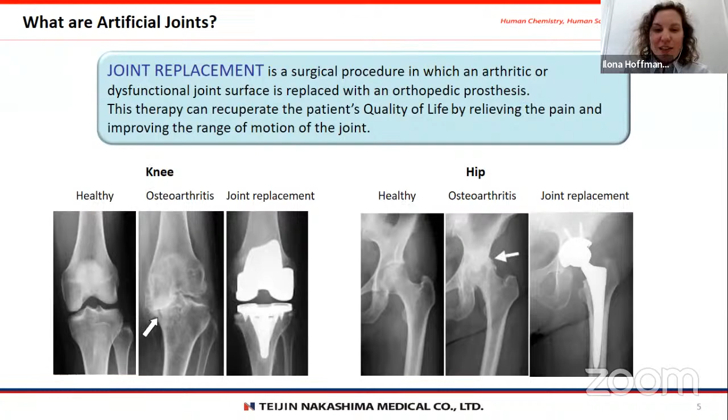The manufacturing process for propellers starts with the design phase. Then the propeller is cast. It is then machined and finally polished.

For the production of an artificial joint, the process is very similar. We start with the design, then it's cast, or in recent years 3D printed. It will then be machined and finally polished.

This final polishing step is actually the reason why we, originally a propeller manufacturer, are now producing artificial joints. A friend of our CEO once visited the factory and said, wow, with this advanced polishing technology you guys could be making artificial joints. Have you ever thought about it? And that's how the business idea got started.

Our products cover several joints in the body, from small joints like finger joints, to mid-size joints like elbows. The main implants are hip and knee, but also trauma fixation devices like the intramedullary nail or clavicle plates. In recent years, we've also started selling implants for spinal fixation.

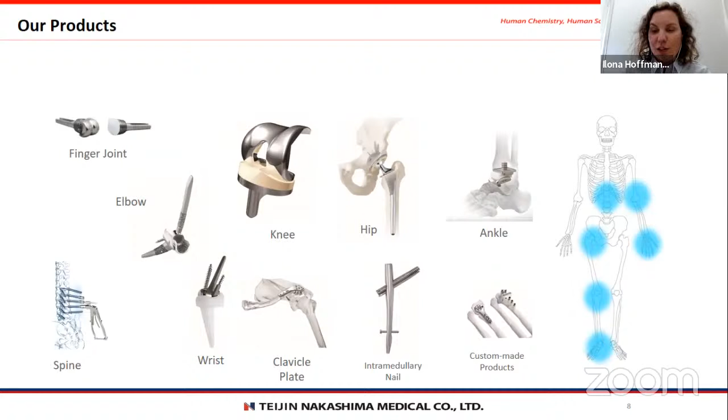Among all these products, the artificial hip joint and the spine products contain 3D printed parts.

We not only produce the artificial joints themselves, but we also make the surgical instruments that surgeons use to implant our products. Here I'm showing you as an example the set for the knee, which contains about 230 fixed items. These are shipped every time a hospital buys an implant from us, together with the implant. This is a service we do free of charge. In addition to those fixed items, we also supply 3D printed patient-matched instruments.

On this next slide I'm going to explain what those 3D patient-matched instruments are. They are personalized cutting guides that surgeons use to prepare the bone for surgery when they want to implant an artificial joint. This improves the accuracy of the surgery, shortens surgical time, and reduces the number of instruments needed for the operation.

The process starts by taking a CT scan of the patient's joint, which is used in pre-surgical planning. From those CT scans we can construct a 3D image of the patient's joint. Based on the size and structure, we decide which implant size is roughly needed, and together with the surgeon decide where the cuts need to be made.

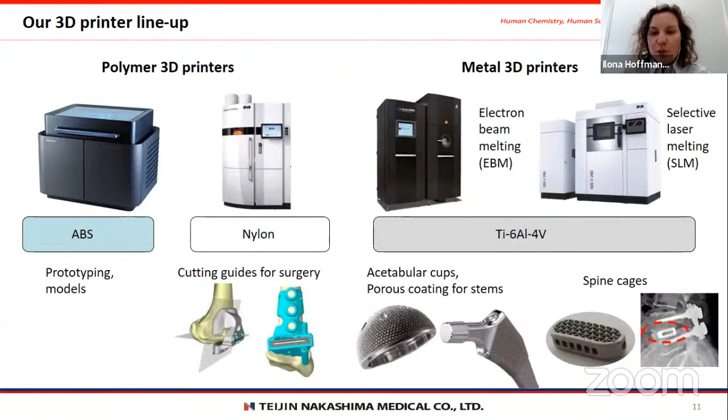We're also using two types of metal 3D printers: one is an electron beam melting printer, and the other is a selective laser melting device. Those are used with titanium 64 alloy to make acetabular cups and porous coating for stems, and to make spine cages.

Our goals in artificial joint development are a longer lifetime, advanced functionality, and optimal performance of the devices. And to achieve those three goals, we are specifically looking at four different areas.

One of them is the durability of the bearing materials. That means we need high wear resistance and low bioreactivity of the wear particles that are produced. And we are using vitamin E to achieve those two goals. So what we do is add vitamin E to the UHMWPE, which is one of the bearing materials used in the joints.

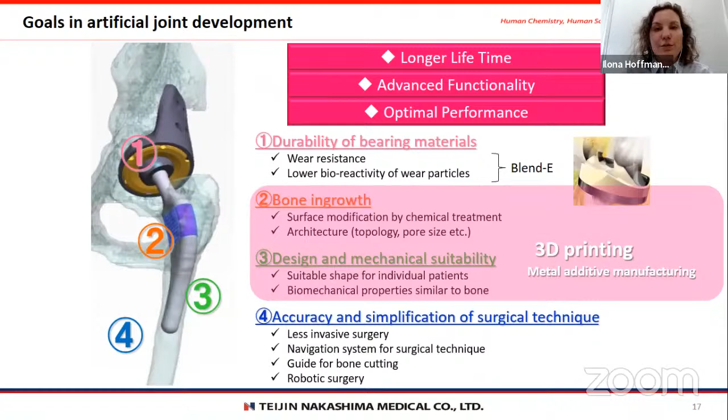Our specialty are implants specifically geared towards Japanese patients. We started making these implants because the Japanese population is on average shorter compared to Westerners, and most implant manufacturers doing business in Japan are actually American companies. So their implants are designed for Americans, and many of their products are too large to fit a shorter Japanese person's bones.

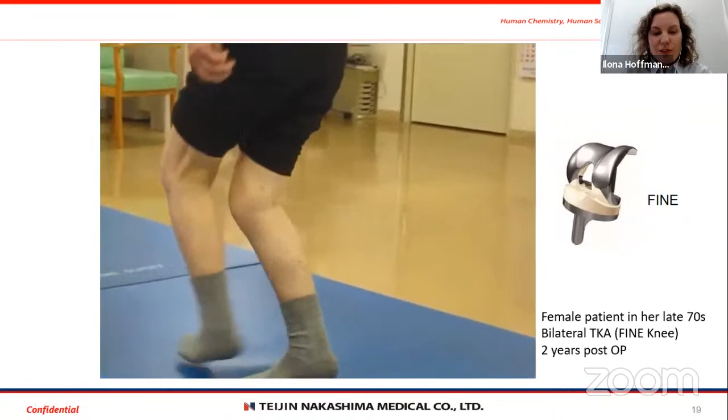Here I'm showing you a patient who received our artificial knee implant. She's in her late 70s and got bilateral total knee arthroplasty, meaning both of her knees are now artificial implants. This was taken two years post-operatively. You can see she's sitting without problems, and she's also still agile and running around pretty quickly.

So what are the steps to do metal additive manufacturing? First you create a 3D CAD model, and that data is sliced by software to be fed into the 3D printer. Inside the printer, you have a powder bed, a layer of metal powder that is melted by an electron beam to produce the part. Once one layer has been selectively melted, a rake spreads another layer of metal powder over it, and that is melted again. This process is repeated until you get your final part.

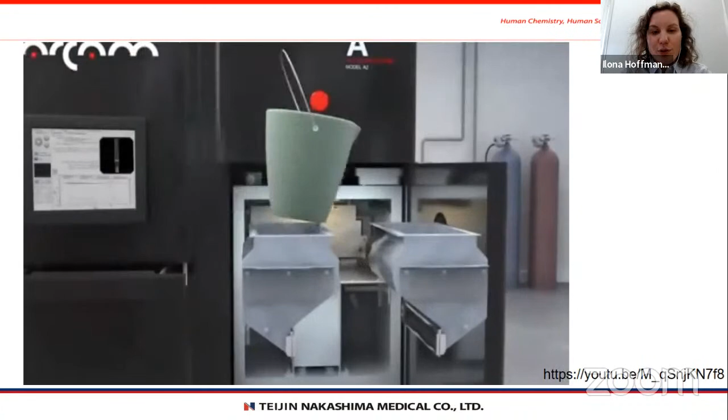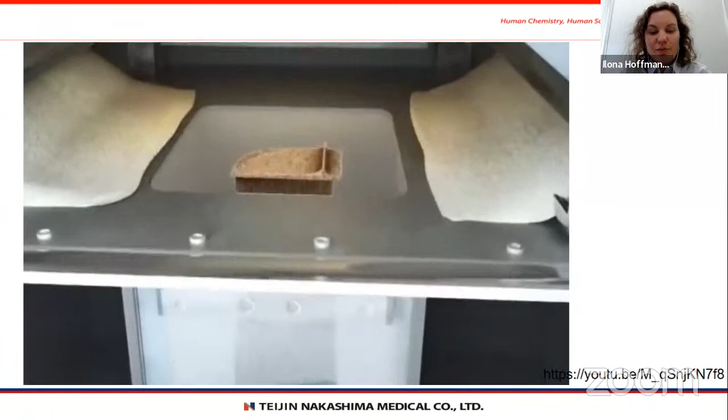First, the 3D printer is filled with the raw material, which is metal powder. Then the rake deposits the first layer, and that's being melted. Then the next layer is spread out and melted, and so on and so forth, gradually building up the whole part. That is then taken out. There's still a lot of powder surrounding the part, so we need to depowder it, and it's blasted to remove the excess powder.

Another advantage is that 3D printing is a free-form fabrication process, meaning no molds are used to produce the structure, so profitability is largely independent from lot sizes. You can start with lot sizes of one, because you don't need to produce hundreds or thousands of parts to offset the high cost of a mold. 3D printing also allows for near net shape manufacturing, which reduces the processing steps needed afterwards, and it can lead to reduced waste compared to subtractive manufacturing, where depending on the shape of your part, you have to cut away a lot of the material you started with.

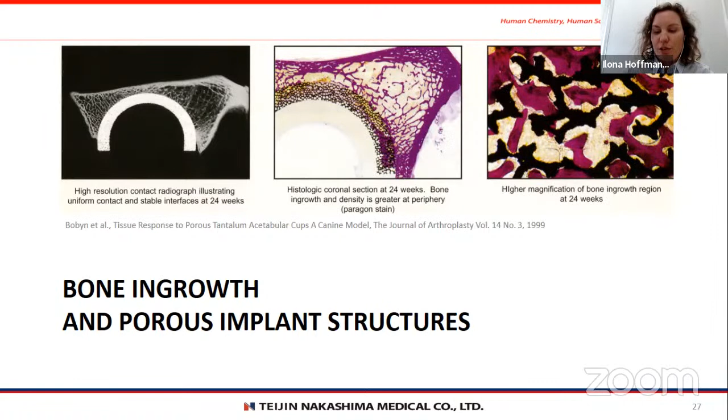Next, I'd like to talk about bone ingrowth and porous implant structures. Implant fixation can be broadly divided into two methods: cemented implants and uncemented implants. In the case of a cemented implant, the implant surface is usually smooth, and cement is added between the implant and the bone. The cement sounds like glue, but it doesn't quite work like glue. It's more like a malleable clay that takes on the shape of both the bone surface and the metal implant surface, and gives you a good fit between those two parts.

In the case of uncemented implants, they have a porous coating on the surface, and the porous coating next to the bone is thought to let the bone grow into the porous structure. Because the bone ingrowth is required for this type of fixation, it's usually reserved for younger patients because their bone is more active and more likely to actually grow into those porous surfaces.

However, this bone ingrowth process takes a little bit of time, and until bone growth is established, the implant needs to be fixed in place with a different method. For that, usually screws are used, and those are oftentimes used in combination with friction—a surface that has a high coefficient of friction. So what I'd like you to remember is that until bone ingrowth has occurred, a different fixation method is needed.

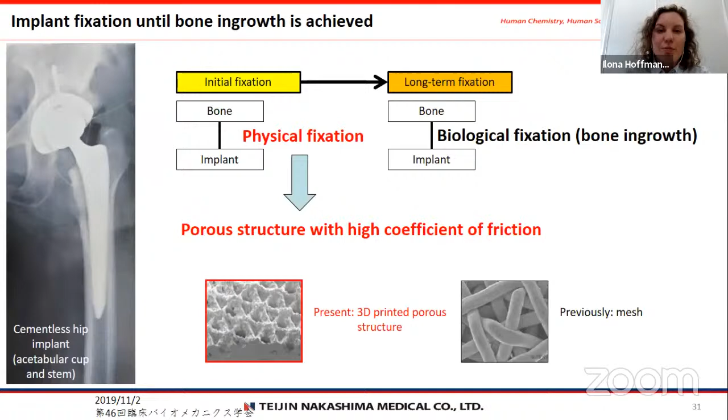There are several conditions that need to be met for bone ingrowth to occur. The first is that pore sizes have to be at least 350 micrometers in diameter. Why 350 micrometers? Bone can only form if there are blood vessels present, because bone cells need a constant supply of nutrients provided by blood vessels, and blood vessels need a space of about 350 micrometers to grow into the porous surface. That's where the 350 micrometers come from.

It is recommended that the porosity be 50% or more. And strong initial fixation is really important - that means strong initial fixation until the bone ingrowth is established.

And also you want to make sure that the chemical and mechanical properties are as similar to the in vivo conditions as possible. There are several other conditions that have been suggested to improve bone ingrowth, but I'll just leave it at those.

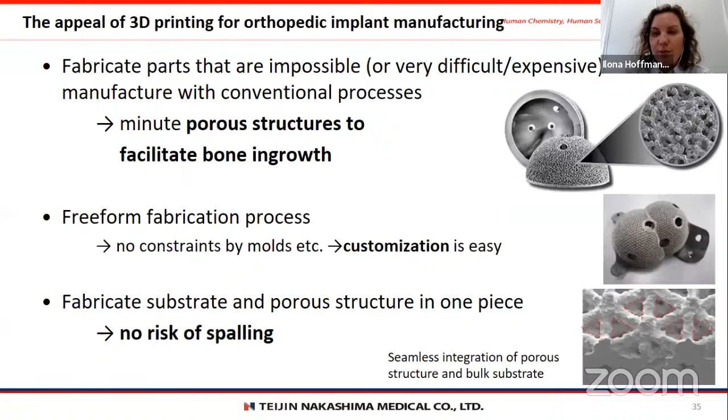Our approach to produce such a porous structure for an acetabular cup is this product called the GS cup. The GS comes from the structure, which is modeled after a geodesic dome. This implant structure is comprised of 3 layers: on top of the bulk substrate, we have 2 porous layers topped by small spikes. The primary fixation of this implant is done with these small spikes on the surface, giving long-time fixation by bone ingrowth into the 3D pores, with no risk of spalling. This structure is used both in the acetabular cup and on the stem part.

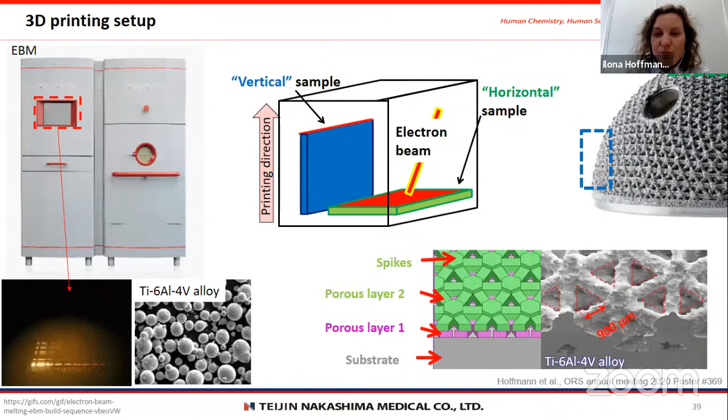The samples used in the studies are three different kinds of the geodesic structure: a vertically printed sample with spikes, a vertically printed sample without spikes, and a horizontally printed sample with spikes. We compared these to pure titanium mesh, our previous generation implant surface, and for the sake of comparing to other researchers' papers, we also included mirror polished titanium.

The experimental setup is quite easy. We used 10 PCF sawbone as the sliding substrate. Why sawbone instead of real bone? For one, it's difficult to get a large supply of bone. We did 3 specimens for each sample, which would have required many different bones, and bone can have different properties from different donors. To remove those uncertainties, we opted for this artificial bone. Sawbone is a solid rigid polyurethane foam shown to have similar properties to actual human bone. The 10 PCF is the density, meaning 10 pounds per cubic foot, and this specification is believed to model osteoporotic bone, which is what many patients getting artificial joints are dealing with. That's why we used that specification.

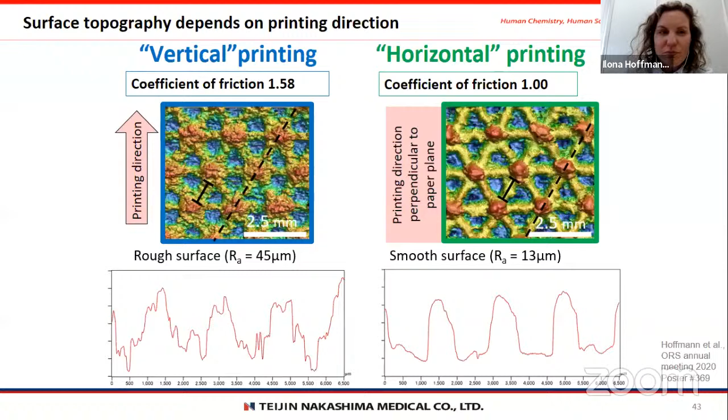Then we also wanted to know what's going on with the change in coefficient of friction with the sliding direction. So we looked at the spike placement. On the right side, when we slide the sample parallel to the printing direction, we see these lines of spikes that are interacting with the sawbone, but there are also corridors in between where there's no spike — a free space where nothing is happening.

On the other hand, if we slide perpendicular to the printing direction, the spikes are covering the whole width of the sample. So there is no unused material, so to say, where no spike is interacting with the sawbone surface, and naturally we're getting a higher coefficient of friction in that case.

In conclusion, switching from titanium mesh to a 3D printed porous structure doubles or triples the friction coefficient. Due to the higher surface roughness in vertical printing, the coefficient of friction is 1.5 times higher than in horizontal printing. Adding spikes increases the friction by 30%, and depending on the sliding direction, the coefficient of friction changes by 9%. So the coefficient of friction can be fine-tuned by varying these parameters.

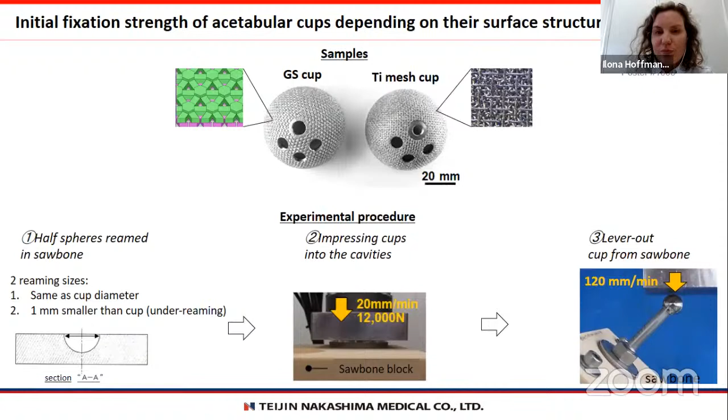Another thing that we notice is that with the GS cup, we're getting sawbone damage in the rim area.

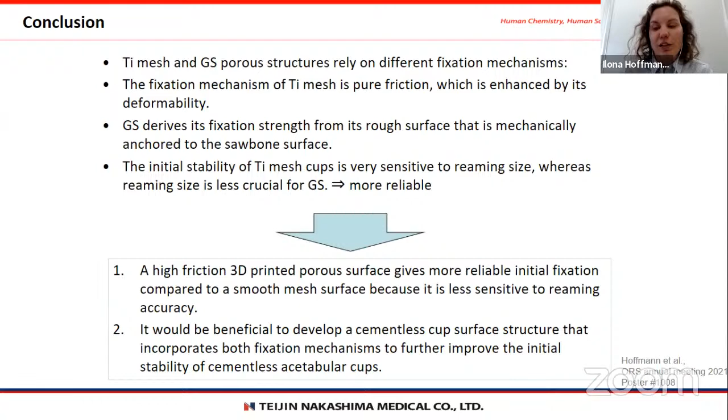And with that, I'd like to move to the last part of my presentation, which is custom-made implants.

So why do we even need personalized implants? Pretty easy: each patient has their individual bone shape, determined by their body type, sex, ethnicity, etc. Each patient is likely to have a different progress in whatever disease is causing them problems. Depending on the attending surgeon, they may also use or prefer different treatment options. On top of that, each individual patient has their own culture and lifestyle they'd like to continue even after the surgery, which would have different requirements. For example, some people may want to continue their favorite sports or other cultural or religious activities they want to accommodate.

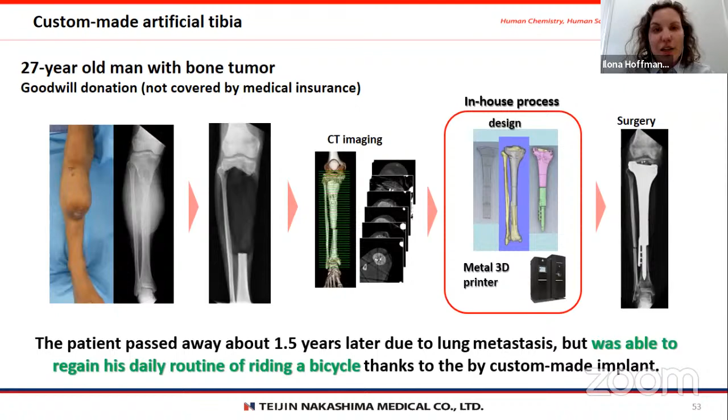So usually we don't do these really unique personalized implants, but our general approach is to have one kind of implant that just needs a little bit of tweaking to fit each individual patient. For that, we need several technologies that need to work together in order to realize the custom-made implant.

This all starts with image acquisition, usually done with a CT imaging protocol at the hospital. Next, we receive those data for the design phase. From the patient's CT data, we extract the bone contour and do a 3D bone reconstruction to see the whole situation that's going on there.

Based on this bone model, we can then do preoperative planning together with the surgeon in attendance and decide on a suitable implant design. Once the implant design is approved by the doctor, we move to 3D printing technology to actually fabricate this implant.

For that, we use titanium 6-4 alloy with extra low interstitials, which is a commonly used material for orthopedic implants. 3D printing allows us to deliver high quality and a quick delivery. During surgery, we also provide surgical support to the surgeons and the hospital staff. After the finished product is implanted into the patient's body, post-operative evaluation takes place.

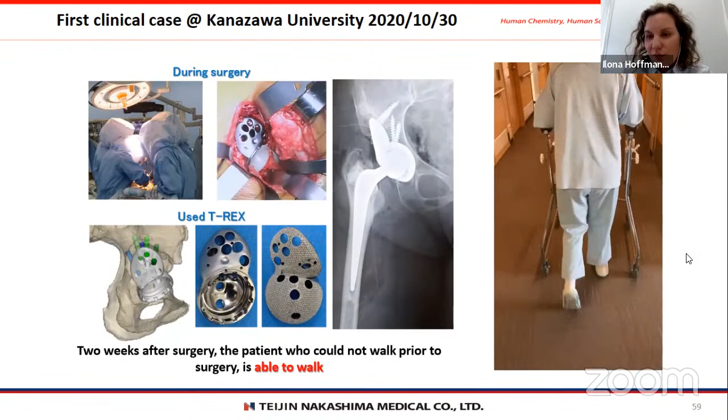In the future, we want to further improve the quality of medical care through personalized medicine. One aspect is the shortening of delivery time and a reduction of cost. For that, we hope to use AI to automate the design so that AI can hopefully propose an optimal preoperative plan based on previous cases and experiences.

The data also needs to be managed. So there's bone morphology data for each case that can be accumulated, analyzed, and organized in a design library to serve as the basis for future development.

Furthermore, we are working on design optimization so that the design reflects the physique, bone morphology, bone quality, activity, and lifestyle of each medical case. To achieve that, the rigidity must be adjusted to be close to that specific patient's bone, and we need optimal topology design.

We are also developing new 3D porous structures to further enhance the initial stability and fixation strength, and make sure bone ingrowth can happen even earlier. At the same time, we are actively developing more precise surgical support devices. So we've come full circle from custom-made propellers to personalized implants.

Let me start by introducing myself and my background. My name is Masahiro Yamamoto from Nakamura Tome Precision Industry. This is just my introduction, I think I don't need to explain so much, it's already mentioned, thank you very much. I have worked in Nakamura Tome since 2006. Today I would like to talk about the current parts manufacturing in the medical field, and I've divided my presentation into three sessions as you see here.

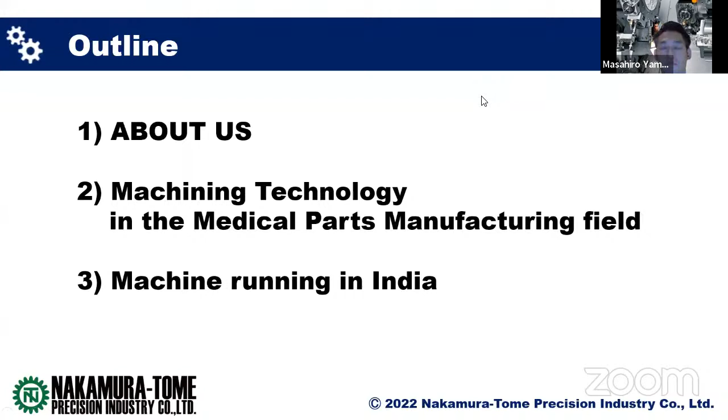Let me explain first about us, what we are doing at Nakamura Tome. Nakamura Tome is a machine manufacturer strongly focused on the multitasking machine. The machine tool is the machine that cuts material into a specific dimension and shape, and it is called a mother machine. The reason the machine tool is called a mother machine is because it is the necessary starting point in manufacturing for all industries, like automotive, aerospace, or construction machines. So all industries require such parts to make the product.

The machine tool makes the parts together with the customer, which become the components, and finally assembles into the final product. The starting point in this manufacturing flow is our machine tool. Therefore, if we provide our customers with good machines and service and solve their problems, that makes all manufacturing better. Through this activity, we try to create the future of the manufacturing industry.

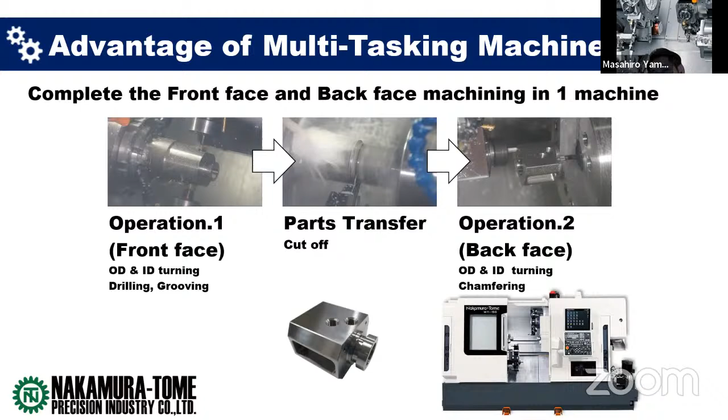There are many advantages to combining that machining process. The first is that it does not take so much effort using the multitasking machine. If multiple machines are lined up, more transportation is needed, along with incomplete in-process items, more operators to run the machines, and more space used. If this can be completed in one machine, the number of machine units can be reduced, allowing for more efficient manufacturing.

Let me explain our product lineup roughly. We mainly have a two-spindle, one-turret machine, and also a two-turret machine with a different concept, as well as a three-turret machine. These are the B-axis machines with a swing B-axis and two spindles, mostly giving them the capability of a 5-axis machine. This is mainly used by our medical customers who manufacture parts for medical applications.

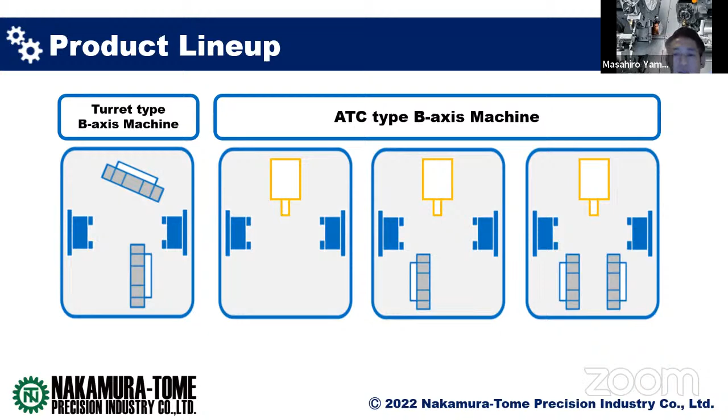We originally came from the machining industry related to textile machinery, and we are very particular about machining. We keep trying new machining technology to expand the possibilities of the multitasking machine. For example, there's hobbing and gear skiving to cut gears, non-step deep hole drilling using a long drill, and hard skiving to machine hardened steel surfaces. For such special applications, we continually try to implement them in our products.

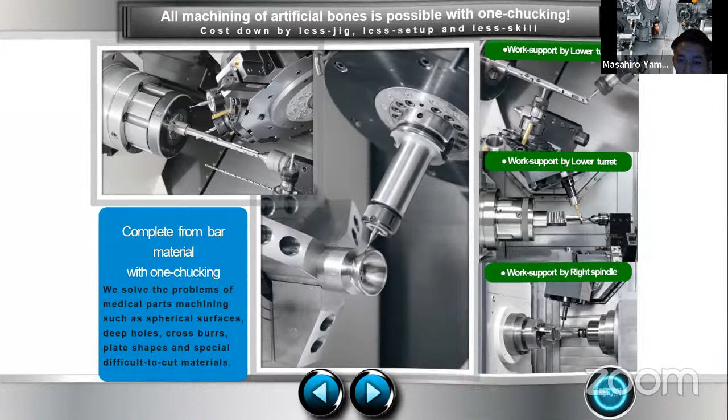And these are examples of machining in the medical segment. For example, the hip joint, artificial knee joint, bone plate, medical device, bone screw, and intramedullary rod.

I'll go through here. So here is also the bone screw - there are a lot of kinds of bone screws. And also the knee joint. First is the hip cup. There are many types of hip cups produced for our customer.

The first video showed how it is cut on the product, just as an example.

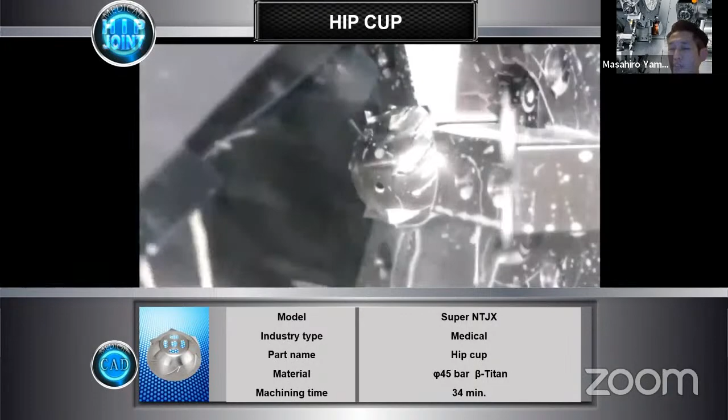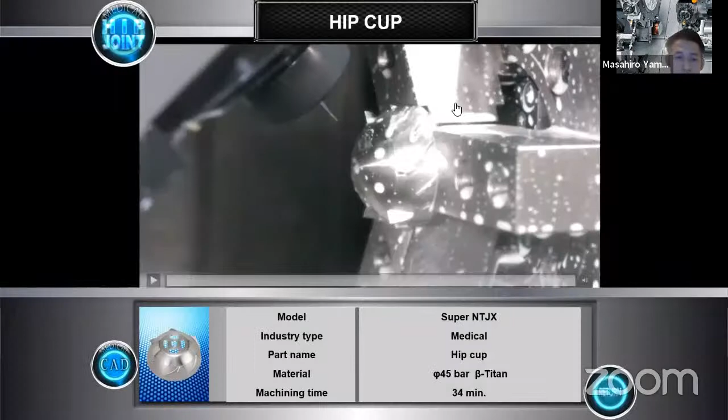Excuse me, can you hear the sound? The video is not audible - no sound? Let me turn off the screen share and share the sound instead. Is that okay? Yes. Okay, okay.

And also another case for the hip cup. This is a very special case - we got a hip cup from the customer which already has some special coating on the surface of the titanium material. So what we face is the difficulty to hold the parts on the chuck to machine them.

There are a lot of requirements for angle hole drilling on the parts. So what we offer to the customer is a very special, unique chuck design, cooperated with the chuck suppliers. That is, clamping with two clamps - clamping with OD and also the ID, using double chuck cylinders to hold the parts inside the chuck.

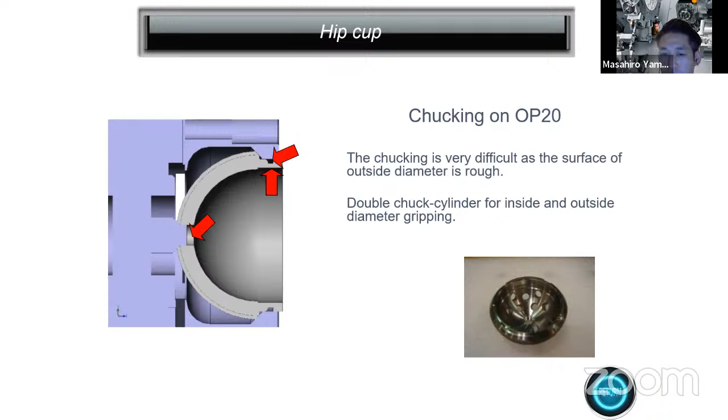So these are the pictures of the actual chuck - how does it look like? And this kind of solution was required to do the machining for this kind of hip cup application manufacturing.

So that is showing the requirement, the project difficulty: workpiece clamping, but also the roundness inside with diameters very tight. And also there's difficulty to cut the parts because of the titanium and angle hole operations with different sizes, and there are 26 different types of hip cups.

So it needs different tooling and also different programs to cut. But we could use tools like the sister tool to run the machine efficiently without stopping. Because of the very tough material, every time after reaching the tool life, the cutting tool has to be changed.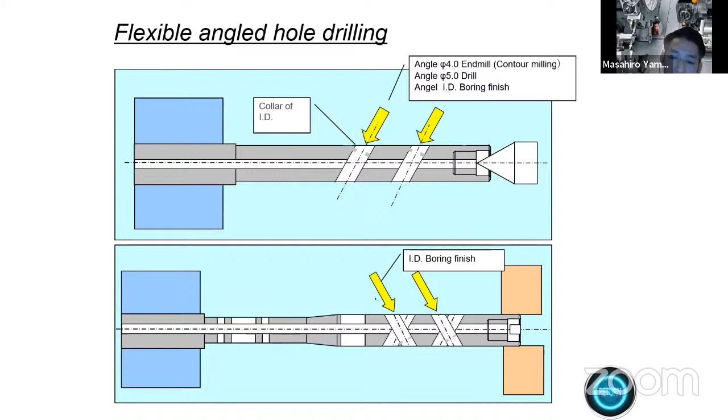We did 3 to 4 steps to complete the angle hole operations, and finally, to finish, we use ID boring tools to get the surface finishing. It was also necessary to deburr inside the hole. So there is a lot of know-how to meet the customer requirement, especially for accuracy to cut the parts.

And this video shows one of the unique points with our function - actually, the bottom pin, which is mounted on the lower turret, supports the parts. Because the parts have very small diameters and long lengths, it was required to support them somehow while cutting.

So to support the part, what we do is insert a pin into the part and then give tension for supporting. This is also one of the machining know-hows for this kind of part machining.

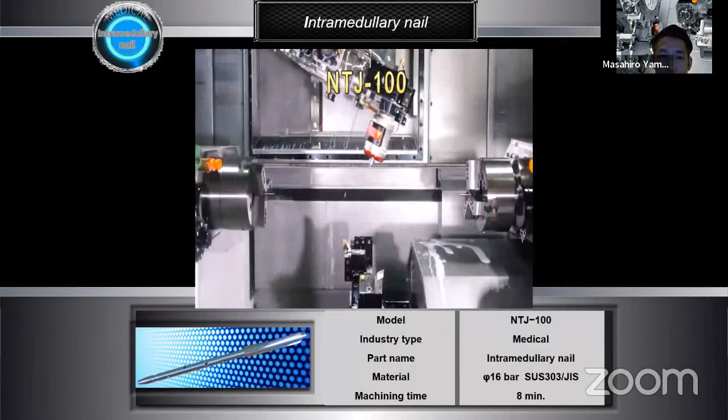This is another case - there also needs a long drill. That shows the long drill operation. There was also a requirement for an angle hole, and on the other side, also required to make the long hole. This case is also all done by one machine, including the transfer from the left spindle to the right spindle.

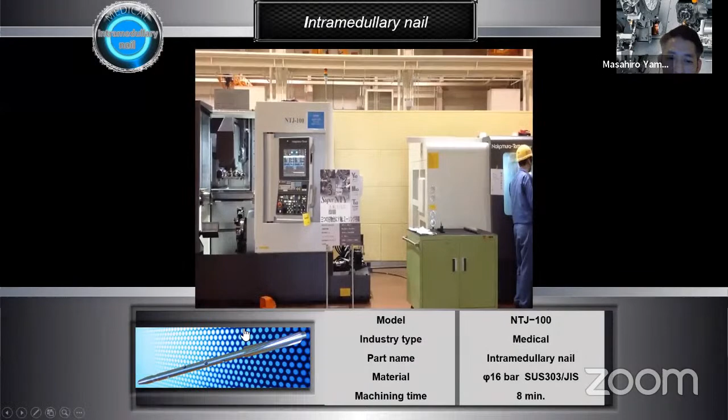This is doing some milling operations. So the next example is a knee system. As you see here, it is also supporting the part itself with a quill. This is a rough cutting, and then it's doing the finishing.

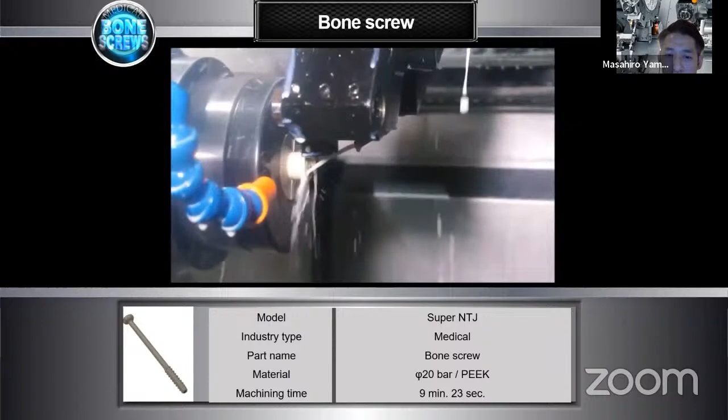Next is about the bone screw. We have many types of bone screws in different sizes and materials. The first video shows machining for PEEK material, machined from bar material.

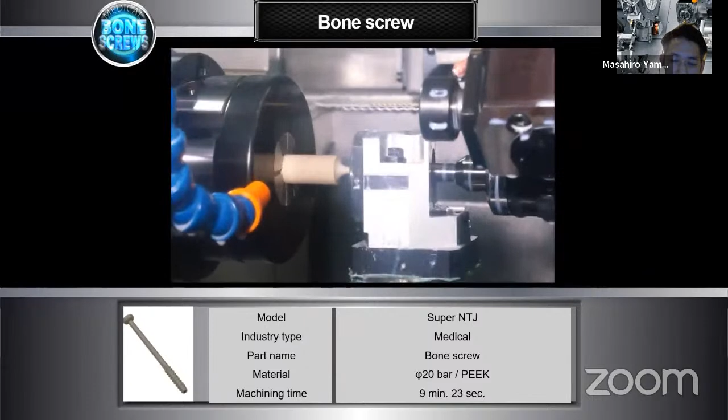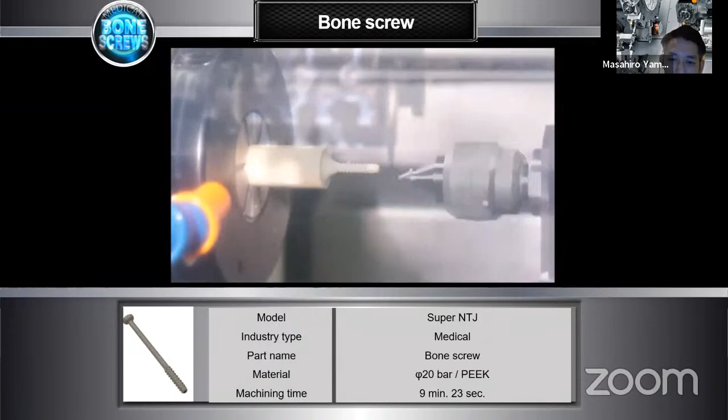After transfer to the right, surface finishing and drilling, and then doing that special hexagon shape on the part.

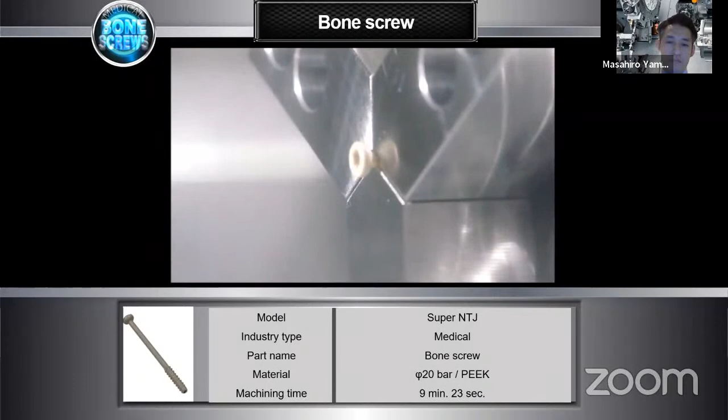There are 4 features for machining these parts: deep hole drilling, hexagon hole machining, special threading machining, and milling.

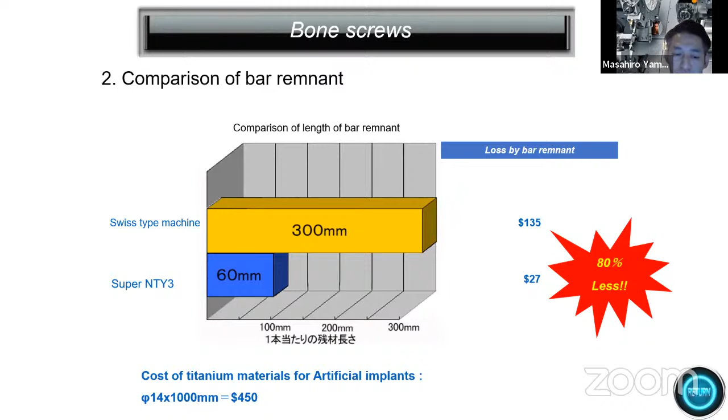That's also a capability comparison between our product and different types of products. Finally, what I'd like to say is that with our product, we could do all the operations the customer expected - like drill, long drill operation, hexagon hole drill, or milling - all done by one machine. That was the reason why we could win this project and ship the machine to the customer's factory.

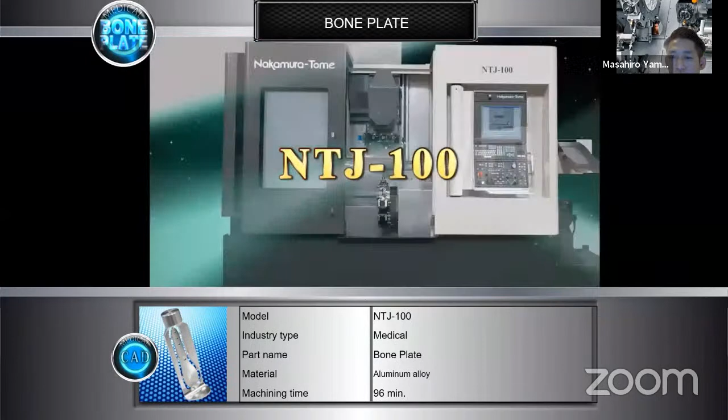The next is about the bone plate. Let me start. The material itself is made of stainless steel or titanium. In this video, you will see the cutting demonstration with aluminum.

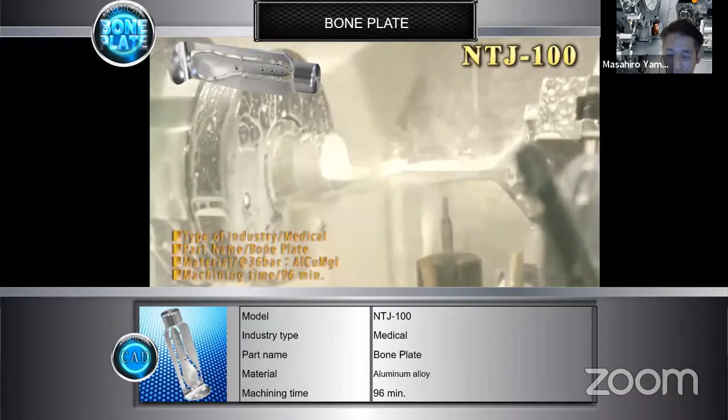The first step is just rough machining to remove all the material to get the proper shape. The reason we did this method is to maintain rigidity for cutting, because the plate itself is difficult to hold with the chuck. That's why we did it this way to cut the parts.

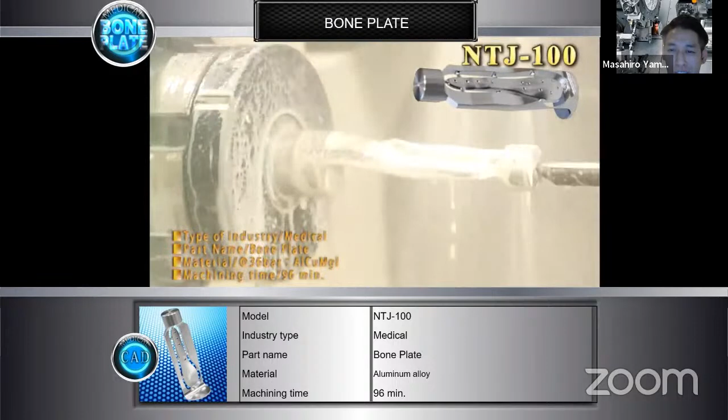There are a lot of processes, many operations for turning and milling, to remove all the unnecessary parts to get the proper shape and dimension. That's how it looks like. There are also a lot of holes with angles included.

That is how we applied machining for the bone plate.

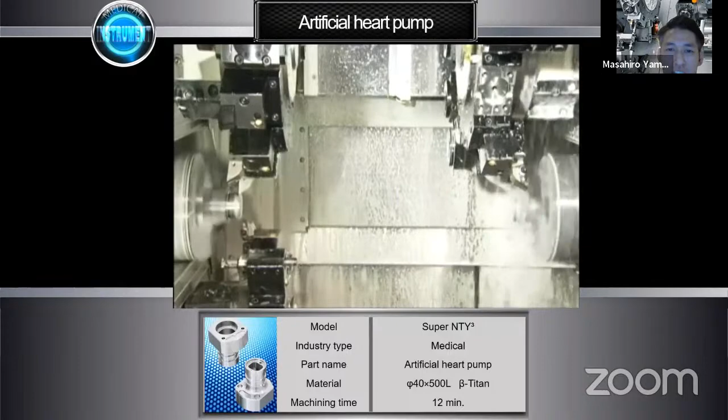Next is about the artificial heart pump. For that component, the parts are machined with three turrets to reduce cutting time. The material was titanium.

Through all the process, we also do deburring and chamfering to complete the parts.

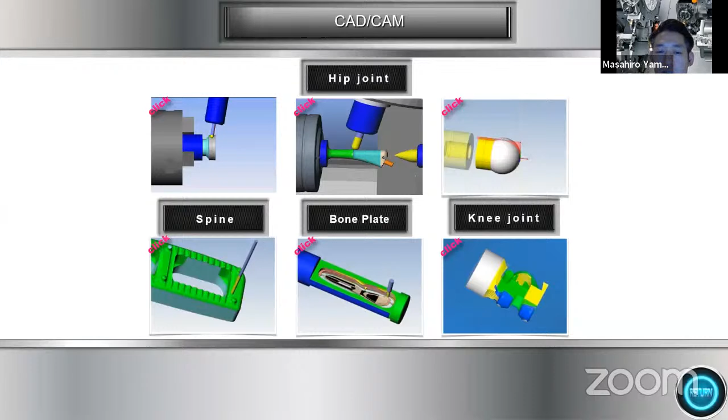There are many cases where the customer who produces the cut parts starts to do simulations through CAD/CAM. These are some cases of how we simulate in CAD/CAM.

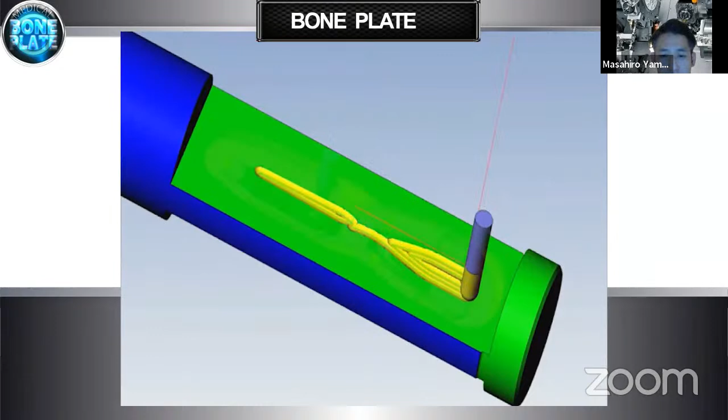This is a case for the bone plate. For such a very special shape required for the parts, we usually use CAD/CAM software to create the program for the machine.

I think that is not so complex a part, but like this.

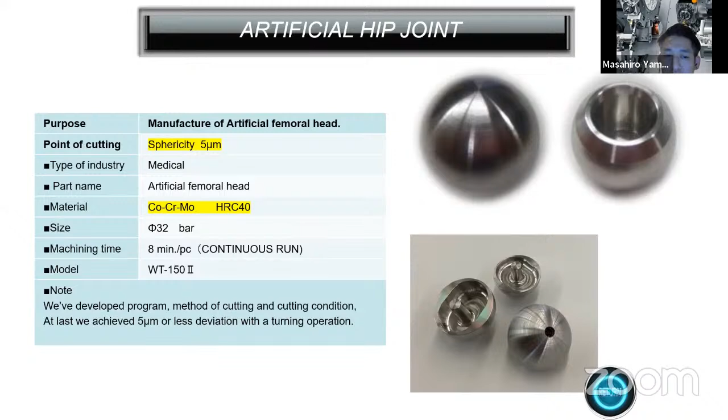Let's skip to the next. Next is about the hip joint, and the typical point is sphericity - the machining tolerance accuracy required is less than 5 microns. The material is also hard, with HRC hardness of HRC 40, and we machined from 32mm bar material.

In the video it shows a different material, but the process itself is the same, so you can see how we cut the parts.

A very special cutting tool was used, so that's why it is not visible in this video, because this is confidential. It was mainly to achieve the surface roughness and sphericity, which is less than 5 microns.

This is actually the in-process measurement, used to measure the actual diameter of the parts, and then transferring, and finishing for the back face.

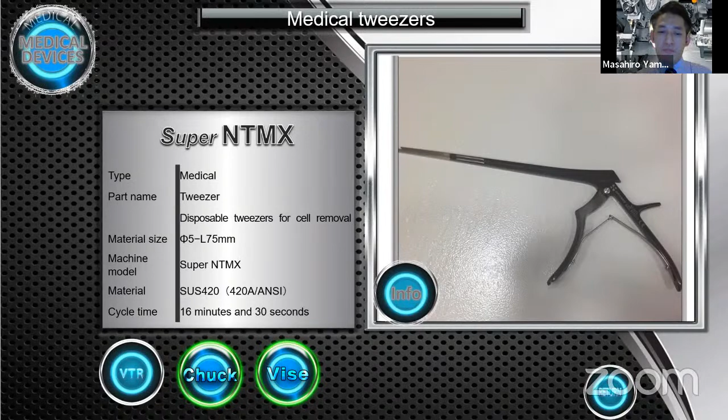Next is about the part: the medical tweezer. That is a tool which is used for surgery. This is the detail of the parts.

As written here, it is used to collect cells from the body for examinations, and it's a single-use device because of infection concerns. It was planned to produce 12,000 parts per year.

The unique point of machining these parts was because of the parts' length and small diameter, it needs some support to grip the parts. So we use a vice to hold the parts while machining.

That shows how it works in the final product.

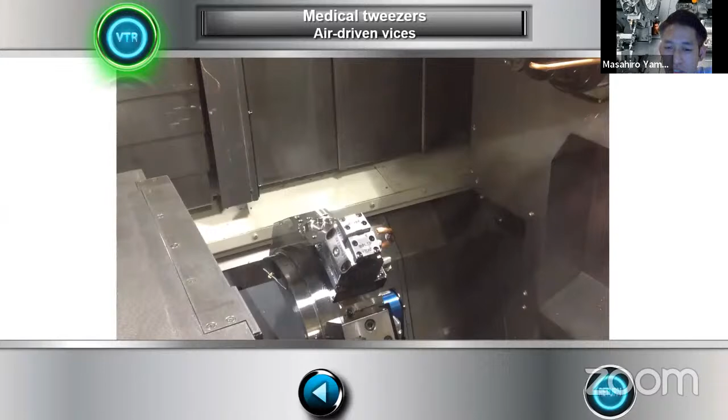This video shows how the vice is actuated. The vice is actuated with air pressure, pneumatic pressure, which grips the parts on the machine. These are the details for clamping the parts, the detail of the vice used to support the parts during machining.

The next part is the liner, machined on the Super NTMX. These parts fit between the artificial bones of the shoulder joint. There are a total of 8 types, depending on the size of the person.

Each type requires an annual production of 50,000 pieces. These parts are manufactured mainly in the US, and also shipped to Asia and Europe.

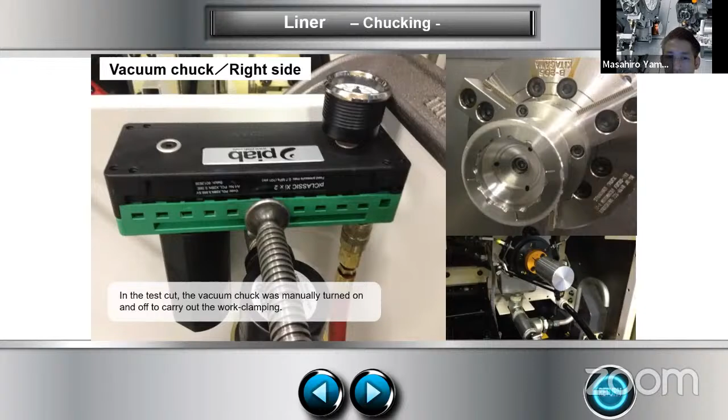This slide shows the detail for the vacuum chuck. The vacuum chuck uses pneumatic air on the right-hand side to hold the parts.

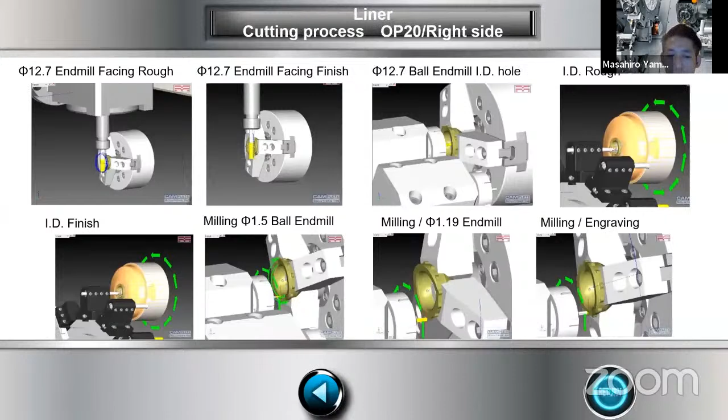Next, the part sample is a surgical device. It is machined from square pre-cut material, and about 80% of the process was milling.

Also, due to the material hardness, it's a very tough, very hard material, about HRC 45. Here it's mentioned: stainless steel 630, HRC 45.

So the difficulty was the tool life. The cutting tool had to be changed every 5 pieces, and that was one of the biggest concerns.

Finally, to run the machine efficiently and continuously, we used the tool life function, as shown in this picture. We put the same tool type on the machine, and every 5 pieces it automatically exchanges for a new tool. By having this sister tool setup, the machine could run up to 20 pieces continuously.

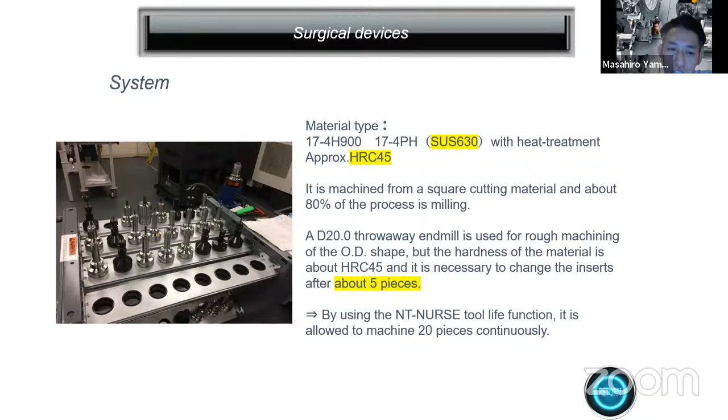Okay, next is about the surgical instrument. That is also material hardness HRC 40. And inside of these parts, the motor will be fitted. It is fitted inside of these parts.

And there are also a lot of requirements for loading, for automation, to run the machine, to manufacture the parts efficiently. So it was required to also mount a lot of tools on the machine.

And there's also the unique machining process, which is knurling. The reason why a T-slot cutter is used to do the knurling process was because of the thickness of the parts being very thin. So that's why it was necessary to do the knurling by a slot cutter.

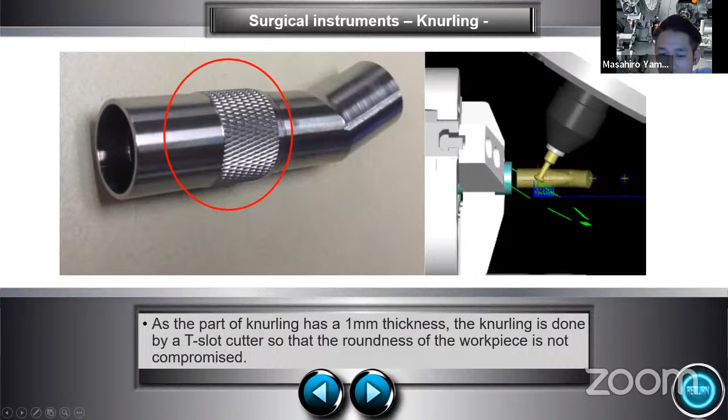And this is showing the process to complete these parts from the square, just a square solid material. So roughly about maybe 20 or 30 processes need to be done. And this is showing the process flow, how it can be completed, shown here on the right side.

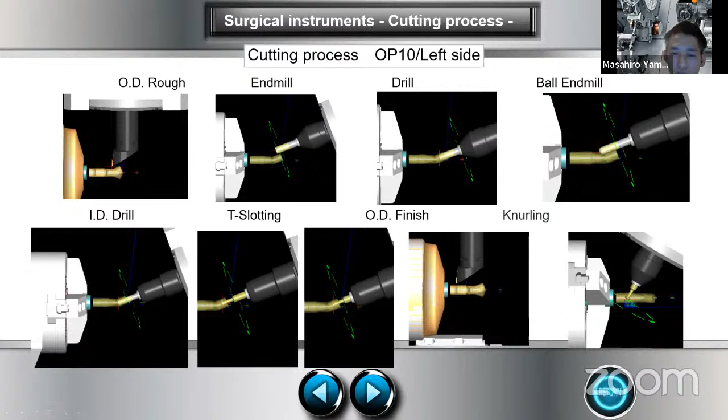As you see here, all of the processes are mainly turning or milling, but these kinds of process integration are required to cut the parts. And next is about shoulder replacement parts, which are called stem parts.

Material was titanium. The reason why the customer chose our product was mainly the faster cycle time, the machining time, and also the rigidity for the turret, the lower turret.

So there are also many requirements on the machines to maintain the parts accuracy. I believe the parts accuracy is important because of a lot of holes and drilling, so they hard required to put a lot of devices to measure the cutting tools and also the parts itself.

And this is the other part, which is called the socket. That also has the requirement for grinding the surface finishing and surface bending, so we could achieve this by burnishing. And that also required quick cycle time, so we could achieve about 10% faster cycle time compared to other brands.

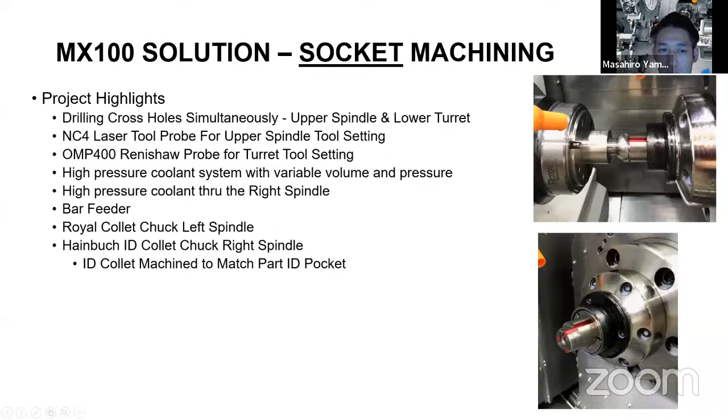And this is one example of the neck fixed plate. That was for the project in Switzerland. Originally, the old solution, the situation where the customer made about 23,000 parts annually per year, cycle time was 30 minutes, and the material was titanium.

So what was required is that the customer needed to manufacture 44,000 parts per year. They also required to complete the machining in one machine.

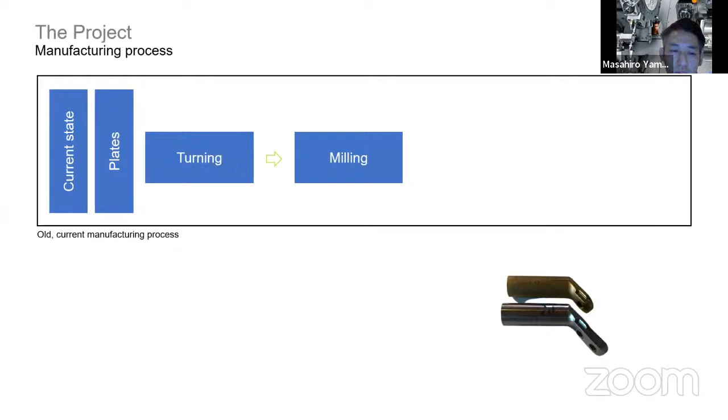So here in this slide shows the previous manufacturing process. The customer used turning and milling machines to complete the parts.

Finally, what we propose is our turning, our multitasking machines, to be completed in one machine. And this is an overview of the system, what we offer, what we shipped to the customer's factory. Let's start the video here.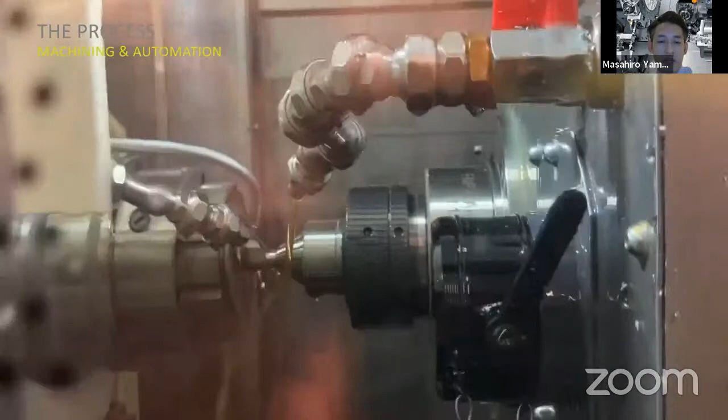So this is showing how it is manufacturing now with our automations. The customer requirement was also to have automation to manufacture these parts efficiently, because they have to increase the production volume.

So as you see here, by having two units, simultaneously can work on the left and right spindle. That is also one of the advantages of the multitasking machine.

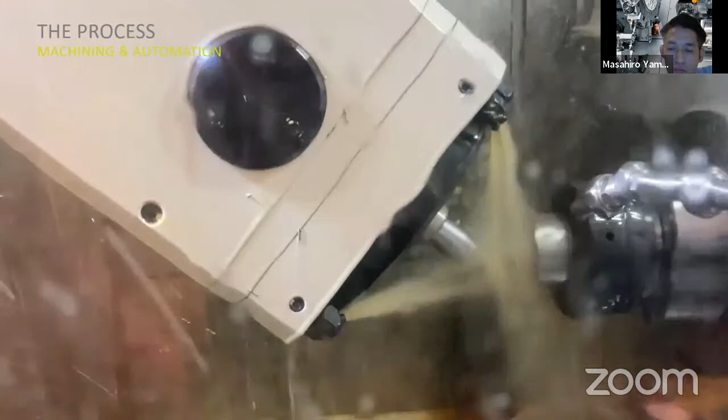So probably it is not visible because of the coolant oil, so let me go a little bit quick. There are a lot of processes to finish all the processing. After it's done, that will unload with automation, with our compact loader, like a robot hand.

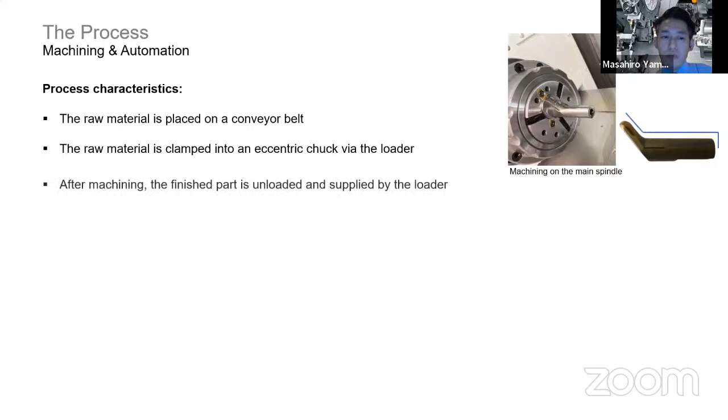So this is a process characteristic. The raw material is placed on the conveyor belt, and it is clamped in the eccentric chuck on the main spindle. After machining, the finished parts are unloaded by the loader.

So that is the overview of the whole system. To load the material from the in-conveyor, like a feeding blank conveyor, that blank material will be picked up by the loader fitted in the machine, and the finished parts are unloaded into another conveyor.

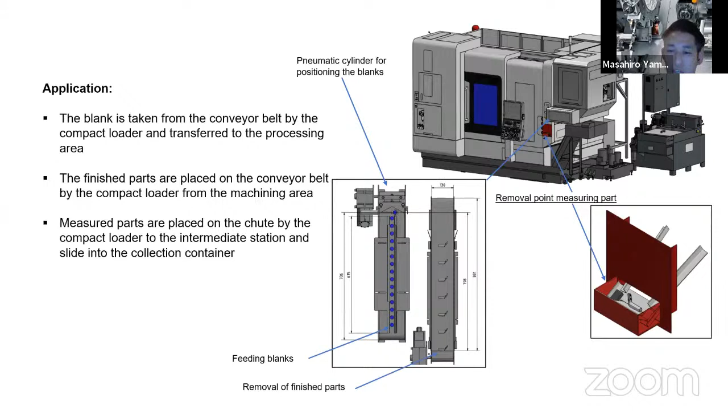There is also a chute which can be checked periodically to collect parts for measurement.

So in summary, why the machine tool is still necessary for medical parts manufacturing, I have two points. The first point is machining accuracy requirement. Our customers mostly say they need very fine surface finishing and roundness, so to achieve this machining accuracy, it is still necessary to use machine tools.

And the second point is manufacturing efficiency, because of the machining time and also the production cost, to run it as a business. Our customers are also saying these points are mostly what they are facing now in manufacturing these medical parts.

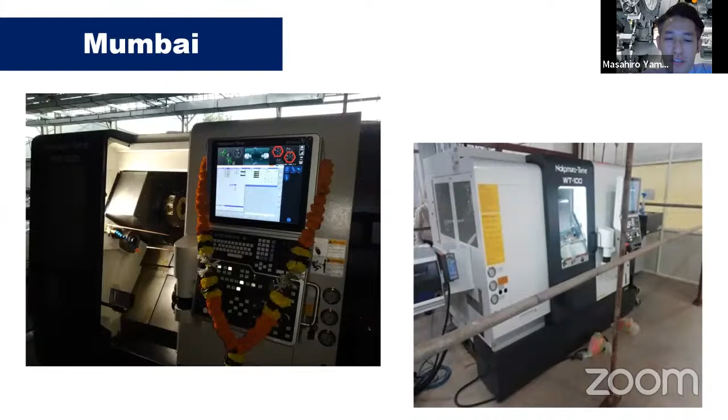So we are exporting a lot of machines in India, and we hope to ship more in the future. Okay, thank you very much for listening. Thank you very much.